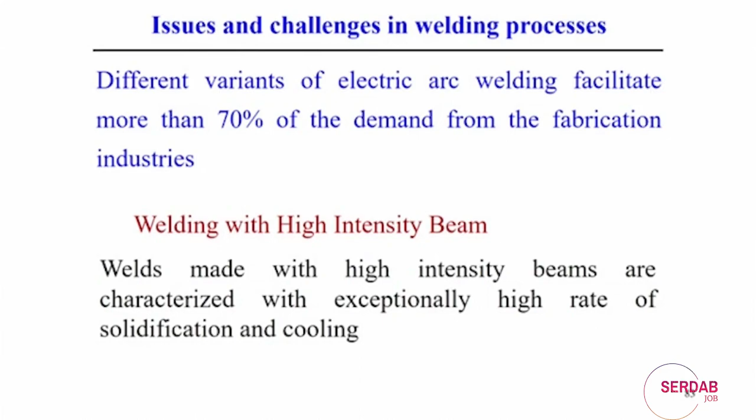So where precision is more significant and cost is not the important factor, the laser beam or electron beam welding process is more preferable. For example, in the aerospace industry, most welded components use electron beam welding, because it is a very costly but precise process. So each and every type of welding process has its own merits and sometimes demerits, its applicability area, and it depends on the cost and importance in terms of the accuracy of the final weld joint.

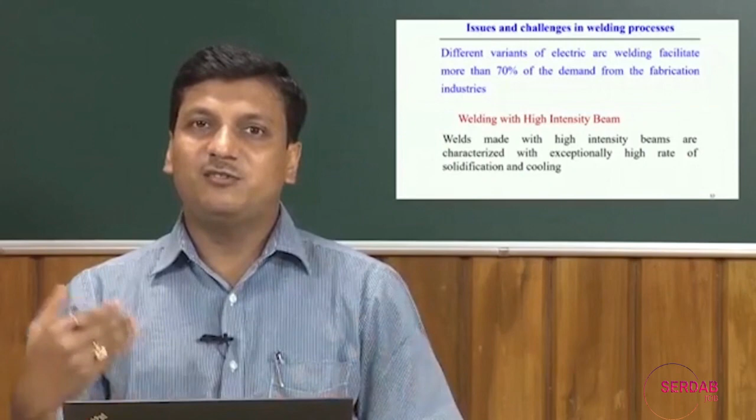But of course, one of the significant aspects in welding with high intensity beams is the excessively high concentration of heat, but at the same time the rate of cooling is normally very high in case of high intensity beam welding process. So a high rate of solidification and cooling is normally observed in high beam energy processes, and this rate of cooling or solidification impacts the final weld microstructure.

Apart from that, there is another challenge in welding of aluminum. If you see, welding aluminum using conventional welding processes is not as easy as welding other materials like steels and ferrous materials. Porosity in aluminum welds is a major challenge because aluminum exhibits 20% greater solubility of hydrogen in the liquid state at high temperature, and that gas may get entrapped and create porosity in the solidified weld.

So if we use conventional welding processes for aluminum, it is really very difficult, and we can expect that the probability of formation of weld defects will be higher in case of aluminum welding. That is why not all welding processes are suitable for aluminum welding - sometimes specific designs or modifications of the welding process are required to join aluminum.

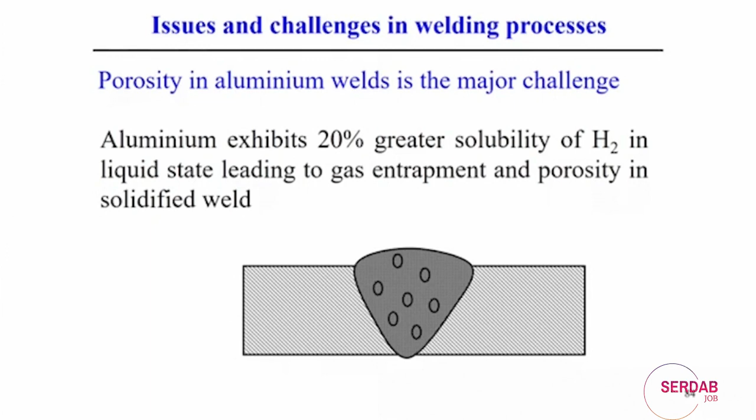In the final welded structure, even with fusion welding processes, high distortion and cracks are other types of problems. Here, high distortion mainly comes from the coefficient of thermal expansion, and this happens during solidification after application of heat, as the molten metal becomes solidified. During this solidification, cracking may also occur, mainly due to a large change in volume, or high volume shrinkage during solidification. This actually creates either solidification cracking or a large amount of distortion in the final weld structure.

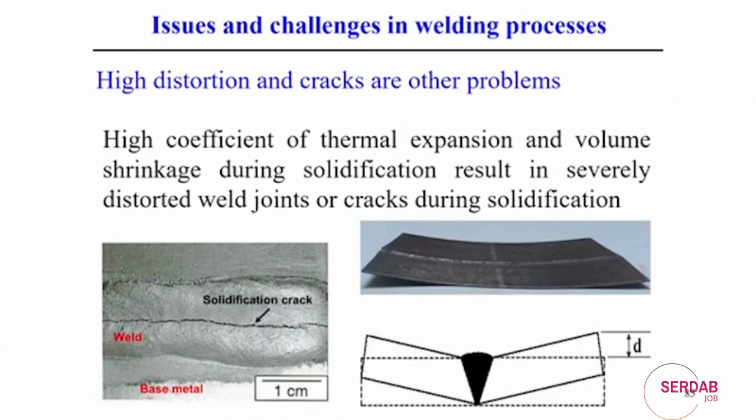We will be having one module to look into the metallurgy of welding processes also. In that process, it is mainly about how the metallurgical structure depends on the rate of cooling during the solidification process. But of course, distortion and solidification cracking, this kind of problem, will always be there during the welding process. Only thing is how we can minimize this kind of problem in different processes.

Other issues of the welding process are basically related to welding of titanium alloy. Using the normal arc welding process is really very challenging, because titanium at high temperature always reacts with oxygen, nitrogen and hydrogen at certain temperatures, and the molten weld pool must be protected from this atmospheric contamination until it cools down to a certain temperature. So that is a real problem.

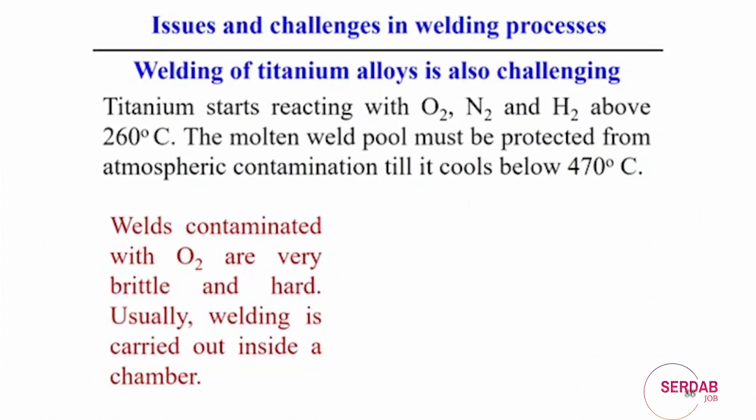It may not be too severe in the case of welding steel, but welding titanium is very difficult, because it easily reacts with oxygen and hydrogen, and the oxygen becomes part of the final weld joint. So the weld can become contaminated with oxygen, and it actually becomes very brittle and hard. So that is why, to avoid atmospheric contamination, in most cases we do the welding of titanium alloy inside a chamber, or some modification can be done when you try to weld titanium alloy, so that this oxidation problem can at least be reduced.

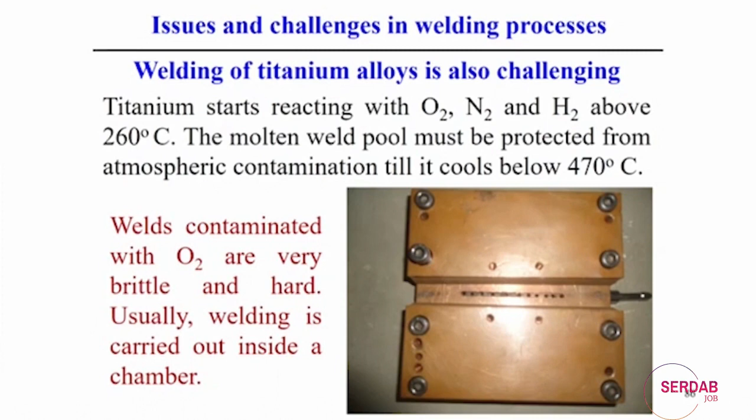So one methodology for welding titanium alloy is simply changing the fixture used for welding two sheet plates, for example. Here we can use a copper plate, and we can use purging with extra shielding gas. This extra shielding gas actually comes from a small hole. If you look into this fixture, it actually protects the titanium alloy during the welding process. So this is one of the easiest solutions for welding titanium alloy. This type of extra arrangement for shielding gas may not be required when you do plasma arc welding or tungsten inert gas welding process. So that is how we protect against this oxidation problem to some extent in the case of welding titanium.

Another advantage, as compared to the fusion welding process, is that recently there has been so much development in friction stir welding. This is one kind of solid state welding process, and in this solid state welding process, the weld can also be created in different zones, with a weld nugget formed in the friction stir welding process. So let us see what the friction stir welding process is.

In friction stir welding, simply two components are joined by stirring of the plasticized material. The temperature should be controlled so that it remains well below the melting point temperature. Frictional heat is generated, and the plasticized material is mixed, which finally makes the weld joint. A typical characteristic of this solid state welding process is that it creates a nugget zone, defined by certain temperature regions: the thermomechanically affected zone, the heat affected zone, and the unaffected base metal.

To do these things, the design of the tool is important to know here - different types of tool probes: cylindrical profile, taper cylindrical, threaded, square, and triangular shapes. These are the different types of tools that can be used for welding purposes. The design of the different types of tools is mainly attributed to ensuring the material flow or mixing of the material, to achieve a good weld joint.

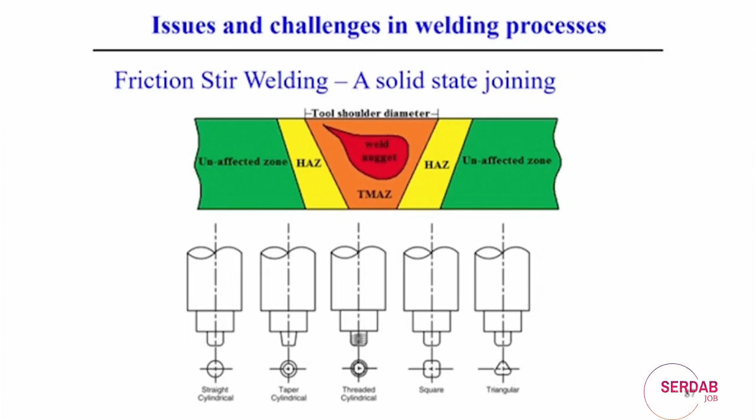So friction stir welding is a recent development in solid state welding, and nowadays people are also using it, as it has so many advantages compared to the fusion welding process. Many problems of the fusion welding process can be avoided if you use this solid state welding process, typically friction stir welding. There is no melting of the workpiece, so problems like porosity, solidification cracking, and thermal distortion are almost physically non-existent.

The only difficulty with friction stir welding is that if there is insufficient material flow, it can create defects. In general, the harder the workpiece, the more the strength limit applies, so a harder workpiece material requires a stronger tool material.

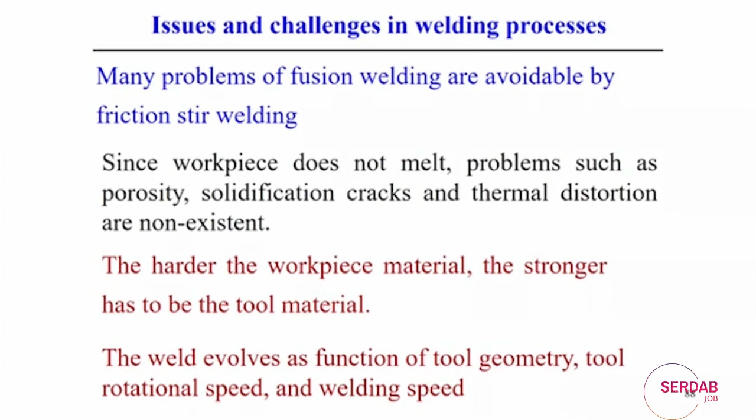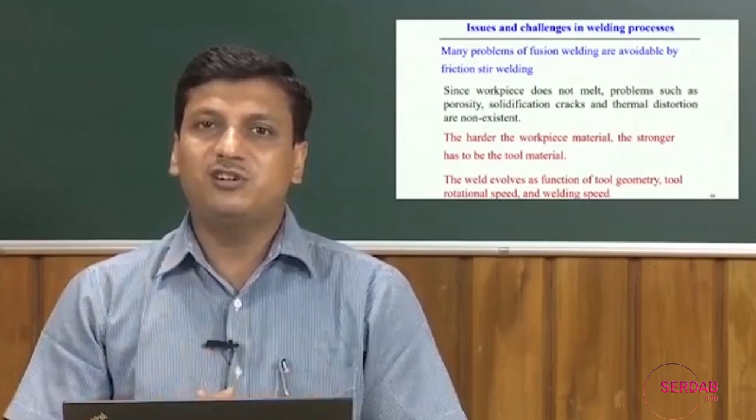The weld quality actually evolves as a function of the geometry of the tool, the tool rotational speed, and the welding speed, all of which impact the final weld joint quality in the solid state welding process.

Therefore, it is extremely important to identify the appropriate combination of tool geometry and other welding parameters, such as tool rotational speed and welding speed, to ensure proper material flow. Using this combination of parameters, we can expect a good weld joint.

But another limitation of this process is that the tool experiences a severe amount of stress, so wear of the tool becomes very important, and the cost of the tool is also a significant matter. This process is also limited when the material is very hard, making welding difficult. So it is still not commercially used specifically for welding very high hardness materials.

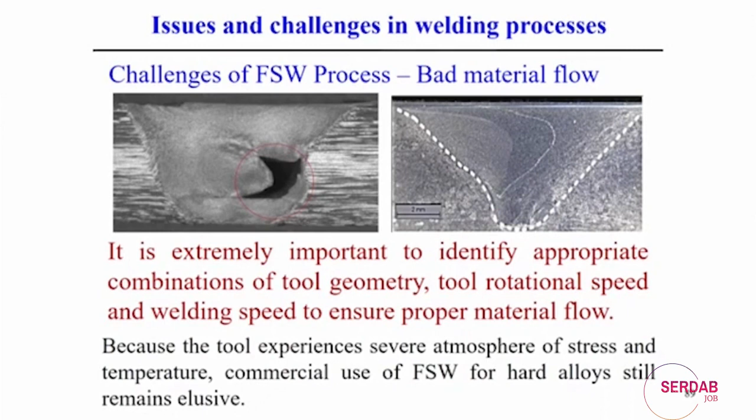Another issue in welding involves nickel based super alloys and titanium alloys, where we generally use friction welding. Fusion welding of nickel based super alloys and titanium alloys is very difficult because of their high melting temperature and high reactivity at very high temperatures. That is the limitation of using fusion welding for these materials, so friction welding is the most efficient method for joining them in critical applications, such as in the aerospace industry.

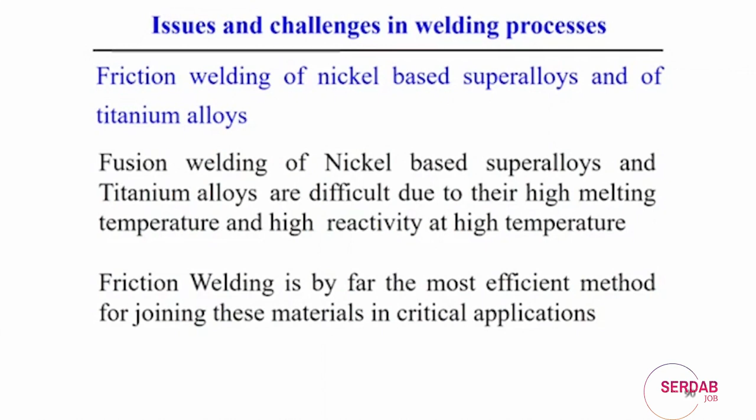Another welding process is laser beam welding of aluminum and titanium alloy, an alternative method. Different types of solid state and gas lasers exist, and laser beams can produce very narrow welds with minimum heat affected zone, high depth of penetration, and small distortion compared to other arc welding processes.

So the difficulty of welding aluminum or titanium using conventional arc welding processes can be addressed by using the laser beam welding process instead.

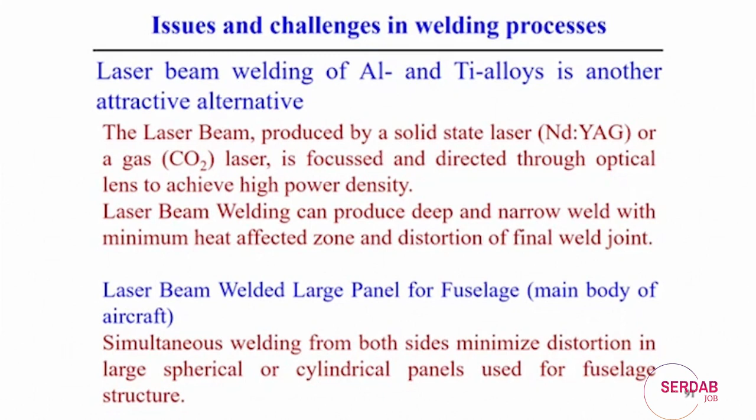For example, when welding titanium alloy using the laser welding process, extra shielding gas may sometimes not be required, as the shielding provided by the laser during welding is sometimes advantageous. Alternatively, welding can be done for these materials in a separate vacuum chamber.

Mainly in the case of large panel fuselage, meaning the main body of the aircraft, we generally apply the laser beam welding process, because simultaneous welding from both sides is possible, and the welding path in this case is very important.

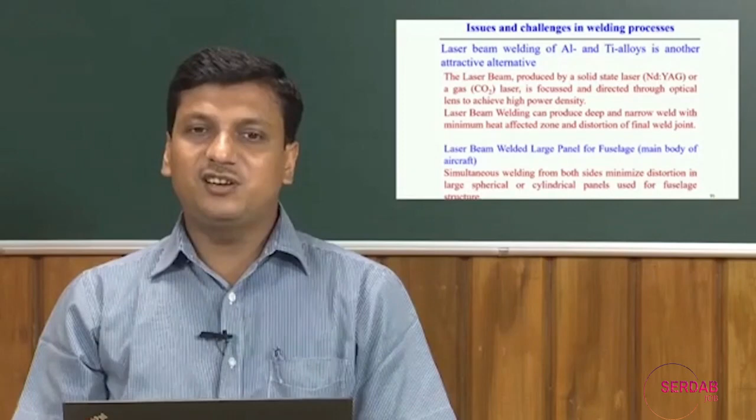If we choose the proper path for the welding process, meaning simultaneous welding from both sides, that helps minimize distortion in very large, spherical, or cylindrical panels used for the main part of the aircraft body.

Electron beam welding is another welding process, mostly used in the aerospace industry.

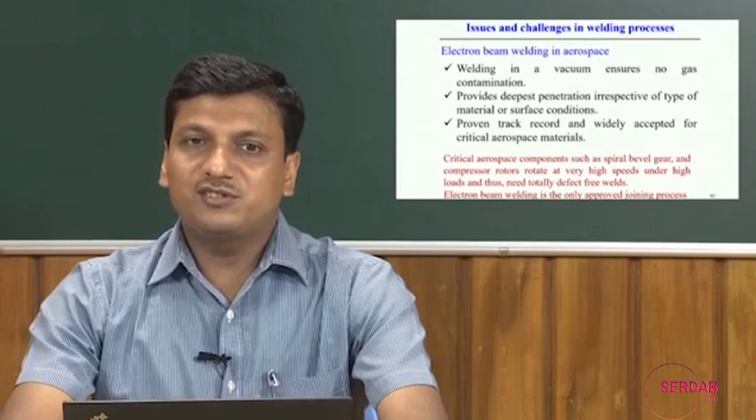This electron beam welding process in the aerospace industry is mainly used in a vacuum, which ensures no gas contamination and provides a very high depth of penetration irrespective of the type and surface condition of the material. This is widely accepted for critical aerospace material.

So most aerospace components are welded using the electron beam welding process. Critical aerospace components such as gears, compressors, and rotors use electron beam welding because defect-free welding is the main constraint here.

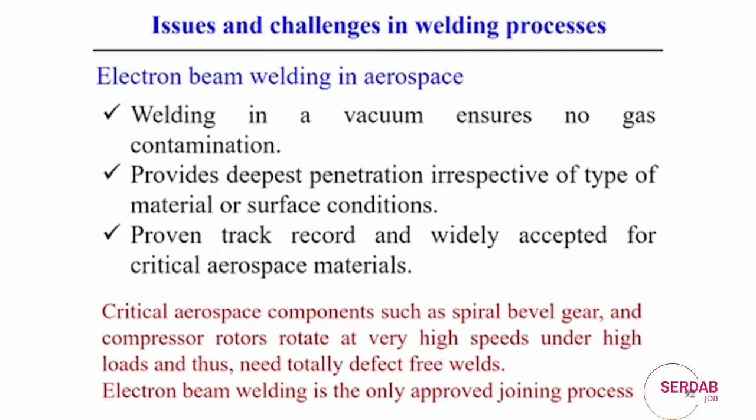Therefore, electron beam is a good solution, an approved joining process specifically used for the aerospace industry. But one main challenge of this process arises when you try to join two dissimilar materials, because electron beam is a flow of electrons with a defined path, and there may be a thermoelectric magnetic field effect.

This is better explained by the Seebeck effect. Because of this, the path of the electron beam gets deflected to one side of the material depending upon the magnetic permeability of both materials. For example, in a combination of copper and steel, in most cases the electron beam is deflected towards the steel material.

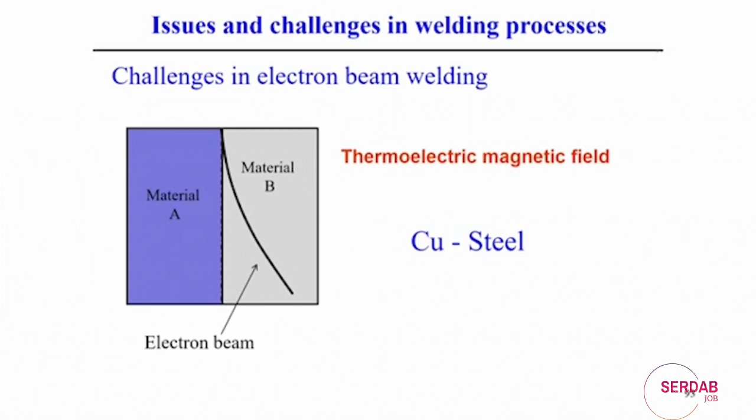So it is very difficult to focus the beam exactly at the joint interface when using different combinations of materials. That is one of the difficulties or challenges that exist in electron beam welding process. Recent developments also happen in the fusion welding process,

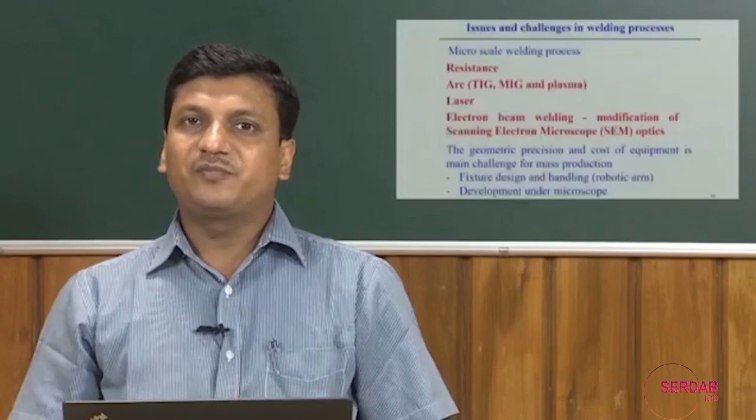with much development happening in micro scale welding processes. Micro scale welding is essentially a reduction in the scale of application from conventional welding processes.

For example, the development so far in micro welding processes includes the resistance welding process being scaled down for micro scale application.

Arc welding, for example TIG and plasma, are mostly developed for application in micro welding cases, along with laser, and finally the electron beam welding process - all scaling down to micro scale application.

Nowadays, when trying to join very small components at a smaller scale, we generally use different micro welding processes - typically resistance, TIG and plasma micro welding processes, as well as laser and electron beam welding processes that have been developed.

Normally we use electron beam welding to apply high density, high heat generation, very focused on a small area with high depth of penetration. For that purpose we normally use electron beam welding, but in micro scale application the principle is simply achieved

by modifying the scanning electron microscope optics - this is how electron beam welding has been developed for micro scale application. In that case, a maximum of 6 watts of power can be generated in micro scale application.

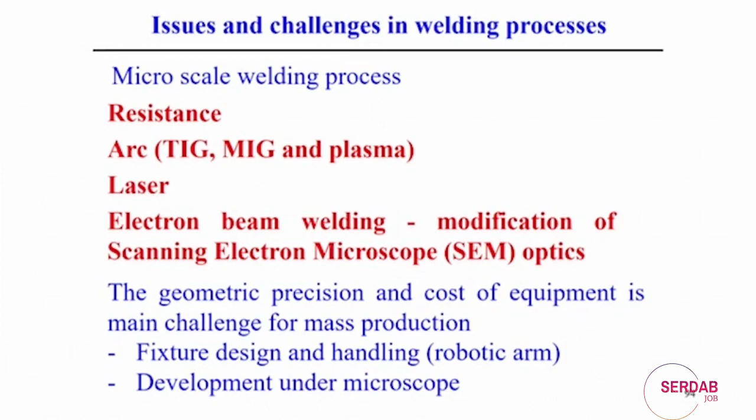But the most widely applicable or preferable welding process in micro scale application is laser, because laser can be very precisely controlled and power can be scaled using different types of pulses. That is why laser welding is more advantageous in micro scale application, but the main challenge of

micro scale welding process is geometric precision and cost of equipment, because sometimes we need fixture design and handling of the small components, which can require a robotic arm,

and in micro scale application sometimes we need to develop the whole welding setup under a microscope. So the cost of this equipment or process becomes very high, and that is the main challenge of the micro scale welding process.

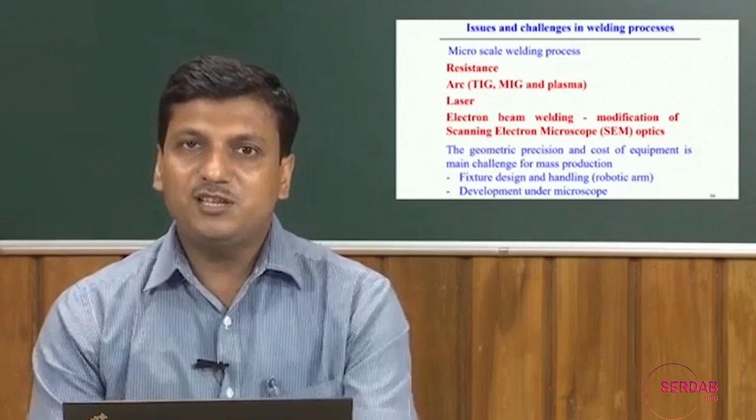With these several issues and challenges existing in the welding process, I conclude the first module of this basic fundamentals of welding and joining process course.

Here I have tried to give the basic mechanism, basic principle of different types of welding processes, different directions and advancements of different welding processes, and what are the current issues and current developments happening in welding process.

I tried to explain this module not in detail, but at an introductory level. In subsequent modules we will discuss in detail the different types of welding processes, different directions, and developments happening in the welding process. Thank you very much.